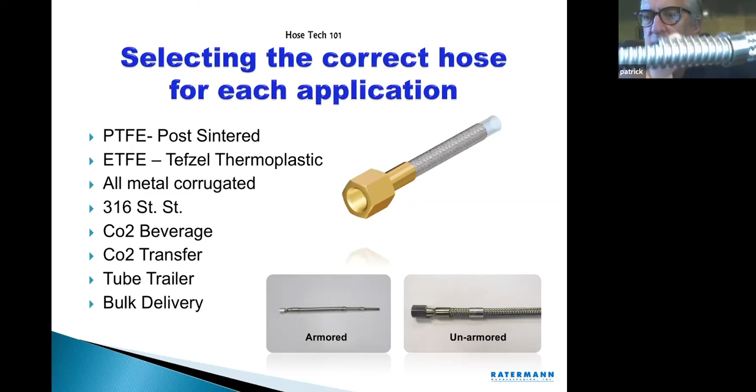Hydraulically, you're pushing the metal, which is much softer. The reason I bring that up is when you mechanically form this corrugation, the very crown of the corrugation is susceptible to cracking when you're filling and the flow rate goes beyond 150 feet per second. So when you're filling with hoses like this, a liquid transfill hose, you never want to exceed a certain flow rate for the hose you have.

And by the way, every hose out there has information stamped or engraved on it. It has the date it was manufactured, the manufacturer's name, and the MAWP, the maximum allowable working pressure. That's a key piece of information that you need to get when you're trying to qualify a hose for a customer. So next slide, please.

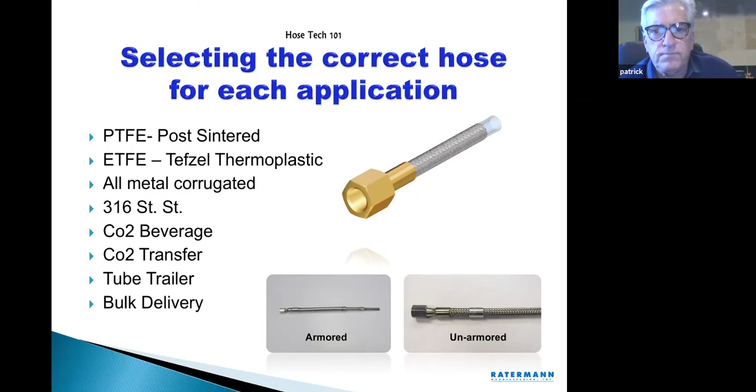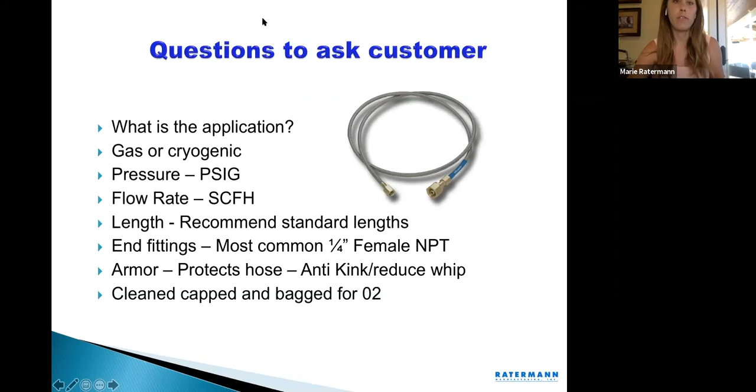Hey, Patrick, I just want to jump in. I think there's one person that isn't muted and keeps popping up. If you wouldn't mind just double checking that you've muted yourself, or mute your cell phone if you're using your cell phone. Thanks. Okay. All right. When selecting a hose, it's important that... that's my security system.

When selecting a hose, it's important that you ask 8 questions if you want to get the correct hose. First off, what's the application? Is it gas or is it cryogenic? What is the pressure you need the hose for? Knowing the maximum pressure is key to getting the right hose. You want to find out, do they want the hose to be 3,000 maximum pressure?

Most fill plants today will fill up to 2,200 at 70 degrees. 3,000 gives you some cushion. If not, we have hoses that go all the way up from 6,000 to 10,000 PSI. Okay, next question is, what's the maximum pressure the hose will see?

After that, ask... somebody must have their microphone on out there. If you wouldn't mind putting it on mute.

You can ask the customer the flow rate. That's important for the size of the hose. I'll be honest with you, over the years of doing this, most customers are not familiar with what their flow rate is. So don't be surprised if they don't know their flow rate. Pressure is more important, making certain that you have the maximum working pressure.

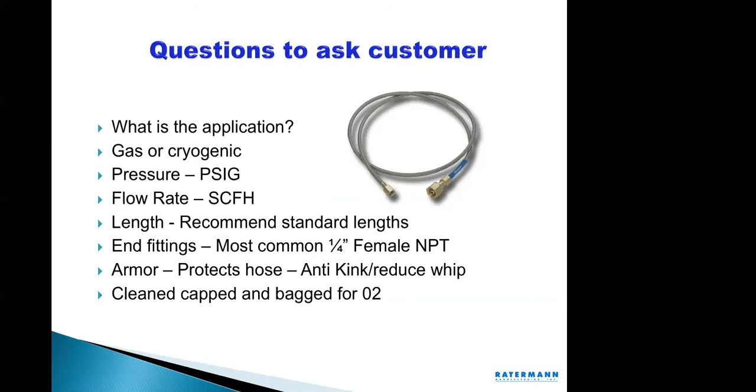What's the maximum working pressure? Flow rate, I don't think you're going to get it, but try it. Length, try to get the lengths in 12-inch increments, 6 foot, 8 foot, 10 foot. That's how we stock them on the shelves. End fittings, whether you need FJIC or you want 1/4 inch, tell us. We could pretty much make any configuration you need.

Armor, it protects the hose. I recommend armor to everyone because the hose will last longer, and as I said before, you won't be able to crimp it. And then last but not least, you want the hose clean, capped, and bagged for oxygen use. So those are the questions.

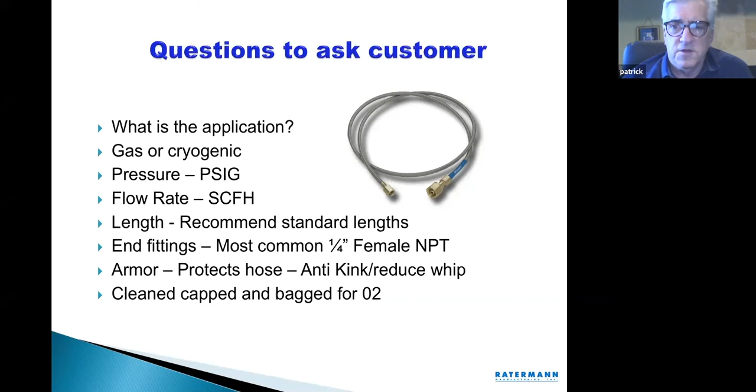Now, I'm going to go through this pretty quick. Permeation, these are some of the common hose terms you hear out in the field. Permeation, as I said earlier, would be compared to a balloon that has helium in it. And the helium will eventually work its way out. That's called effusion. Diffusion would be the opposite of that, gases working their way in.

Maximum allowable working pressure is a question you should ask every customer. What's the maximum the hose is going to see? That will help you determine what's the best hose for its application. Diffusion and effusion has a lot to do with the size of the molecule. The 2 smallest molecules that we deal with on a daily basis are hydrogen and helium. Those are the 2 I'm most concerned about in regards to permeation.

Burst pressure. Every hose has a burst pressure. Typically, that burst pressure is 4 times the MAWP. So if a hose is set up for 3,000 maximum working pressure, the burst pressure is going to be 12,000. In our book, you can find this information. It's throughout our booklet. On the hose section, it'll tell you what the different bend radiuses are and what the maximum working pressure is.

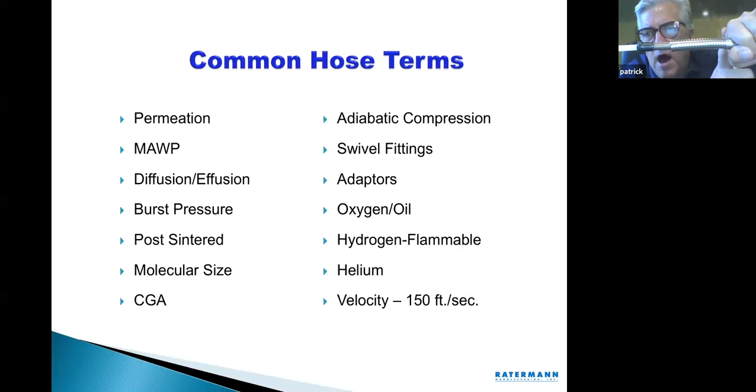So imagine there's oxygen going through here. The adiabatic compression hits the back end of the valve, it's closed, and the heat starts building up in this area. This is where you typically see adiabatic compression taking place. It will literally melt that hose and it'll explode. And it's a pretty loud experience. You'll hear about it from time to time. That would happen about 5 or 6 times a year across the country.

Swivel fittings, I highly recommend swivel fittings, especially on hoses where you're going to need to take it off and on. They don't both have to have it, but one end of the hose needs to have a swivel fitting if you want to be able to put it on without twisting it too hard. Adapters, we've got an adapter for just about every application you could imagine. I would say this about adapters: use as few of them as you need to. Basically, they're another point where you might have a potential leak.

Oxygen and oil, I shouldn't have to tell anyone on this meeting about oxygen and oil, but just in case you don't know about it, they do not mix. You don't want oxygen and oil near each other. If you think that a hose has oil on it, don't use it. Take it out of rotation. You want to keep oil away from anything with oxygen.

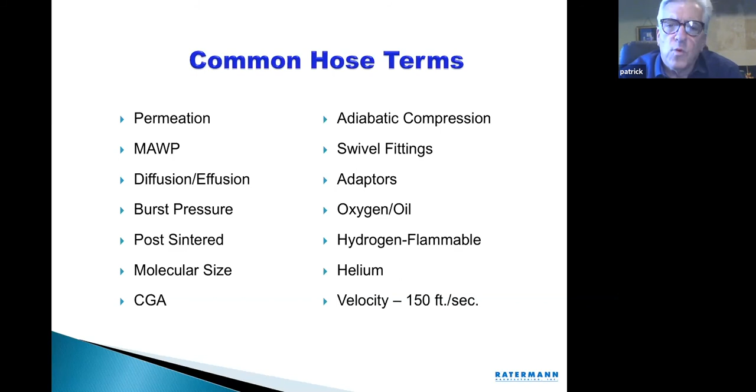Teflon type hoses are used more commonly in fill plants: 6 packs, 12 packs, Teflon hoses. Rigid hoses, I don't recommend at all. Rigid hoses had a time when they were the hose, and through experience of using rigid hoses, people learned that they're going to crack. And I tell people you're always one bend away from it cracking, and they will eventually crack on you. Rigid hoses are the reason the flexible hose industry even started. They needed to find a better way to do it. And they came up with the Teflon type and the corrugated type steel as the inner core, and then use the stainless steel as the braiding for the strength.

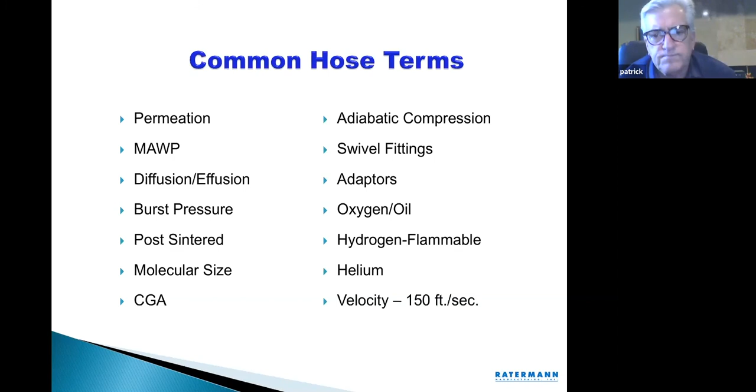Next slide. These are the hoses in the book. I've got the page numbers on here. As I said, get your hands on one of our catalogs because in the classes we will refer to the book. But these are your two standard hoses that if you had a customer that needed a good quality hose for any application, inert gases, anything in the shop, we can make these hoses up to 30 feet in distance and put basically any kind of fittings you need on the end. If you're unfamiliar with fittings, use 1/4-inch NPT. It is the most popular fitting, and you can adapt almost anything over to it.

FPT type hose in our catalog is basically the same as the FP, but it's the post-sintered hose. So permeation drops 75%. I have 2 layers of braid, so it goes up to 3,600. So this is a more robust hose than the FP. It has a lower permeation rate and a higher MAWP. Good hose. For about, I'll say, 23% more in cost, it's well worth it. Next slide.

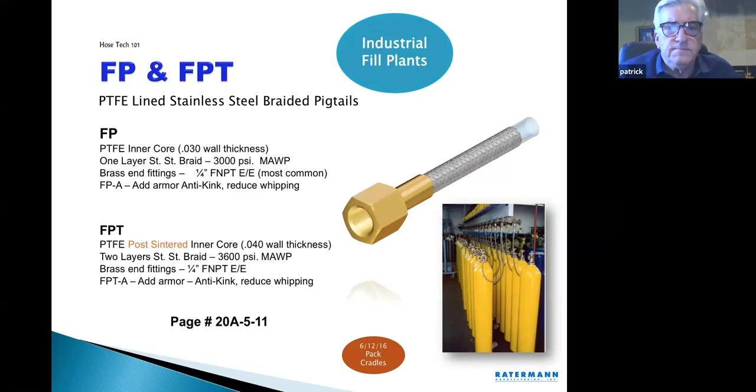We have a hose, if you have anybody doing any gas work and you want a very high quality hose, we just came out with this about 1.5 years ago, FPB. It's got a conductive liner in it. It's designed specifically for acetylene. Will it work with propane? Yes. This is well above what you would use in a propane application, but if you have anybody using high purity acetylene or a critical application, this is a great hose and it's economically priced.

It does have a PTFE inner core that is conductive. We can put basically any kind of brass fittings on this hose, but up until about 1 year ago, this type of hose would have cost in the neighborhood of around $65. These sell for about 43, right in that neighborhood. So they're quite a bit cheaper than what we had previously. Next slide.

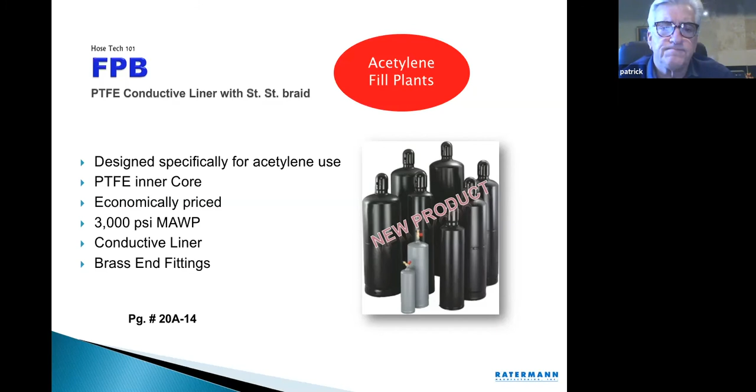This is an all stainless hose. This is a 1/4-inch hose designed for high purity gases. When you use this hose, all the gas will see is stainless, 316. It's all steel. So as I said earlier, with the all stainless steel inner core, there is 0 permeation. So you don't have to worry about any leakage, any gases effusing or diffusing. The working pressure on this hose is 3,850 PSI. This is probably one of my favorite hoses in the catalog. Great for high purity applications.

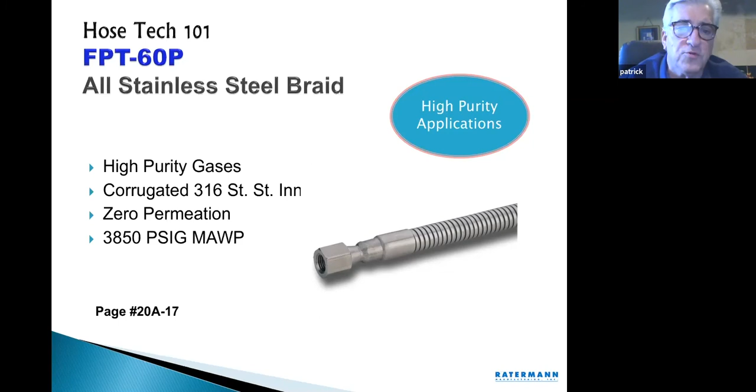We can make this any length you need it with just about any fitting you need on it. We do have a program, I'll talk about it at the end of our session, that can figure out a part number for the exact type of hose you need. Next slide, please.

This is FPZ. This is a Tefzel type hose. The inner core is ETFE, so that means it's a plastic formula. It's basically designed to lower permeation. It brings the permeation down about 60% compared to the FP with an economical price. You need to let us know which one you want, but you can purchase it set up for 3,600 or 5,000 PSI application. Very low effusion. Tefzel is the name of it. Typically, we can put JIC end fittings on this or NPT. You can armor; again, I recommend armor on all of these hoses. Next slide.

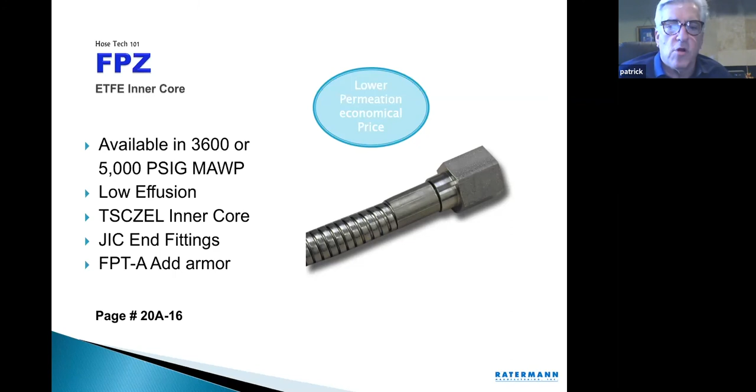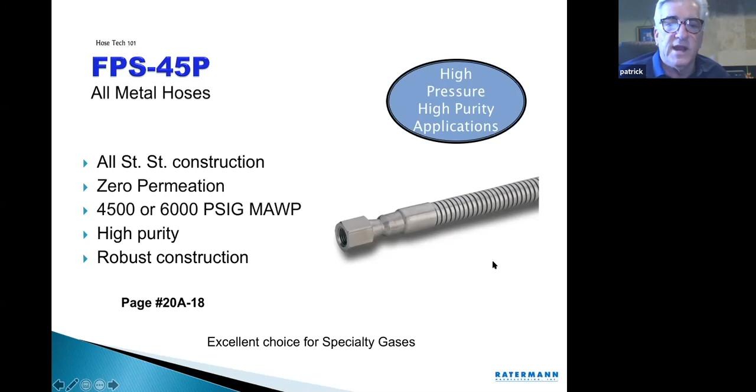This is FPS 45, very much like the hose I showed you earlier, all metal, all stainless. This one will get you up to 6,000 PSI. Great for high purity applications, a very robust hose. Keep in mind, if you're putting it in an application where you're going to be tightening down both ends of the hose, make sure you put a swivel on one end. Next slide.

FPS-C, the picture fell off of this, I apologize, but we do have hose made out of Monel. The inner core is 100% Monel construction. So if you're working with chlorine or corrosive gases, we do have a hose that'll fit that application. We can custom make it any length that you want. There are some companies out there that use Monel for oxygen, and Praxair is one of them. It's become very popular.

This is a great hose. I can see right now I made a mistake on the slide. It says PTFE inner core. That's not accurate. I'll take that off. It's a Monel inner core. And so keep in mind that we do have Monel hoses available. Next slide.

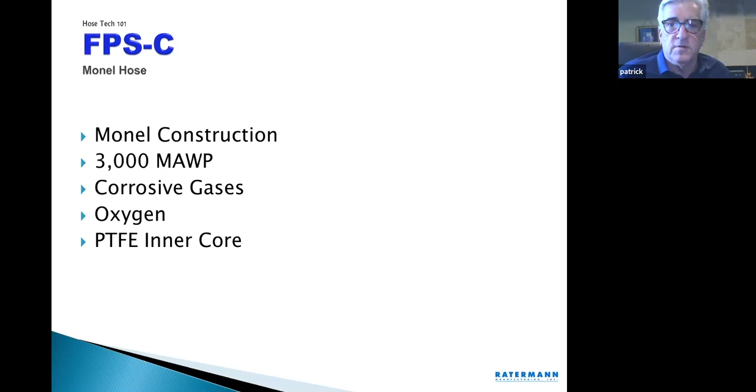CO2 hoses, this is where I wished everyone had a catalog in front of them. When you get the catalogs, you can look through it and you'll find that we've kind of fortified our CO2 line. We have a lot of hoses to choose from.

The typical hose TPL is designed for gas or liquid applications. It's 3,000 PSI MAWP. It's a great hose for beverage applications in a restaurant, bar, wherever you're setting up a gas system or a welding station. These hoses will work great for CO2 transfer. Good hose in 1/4 inch. Next slide, please.

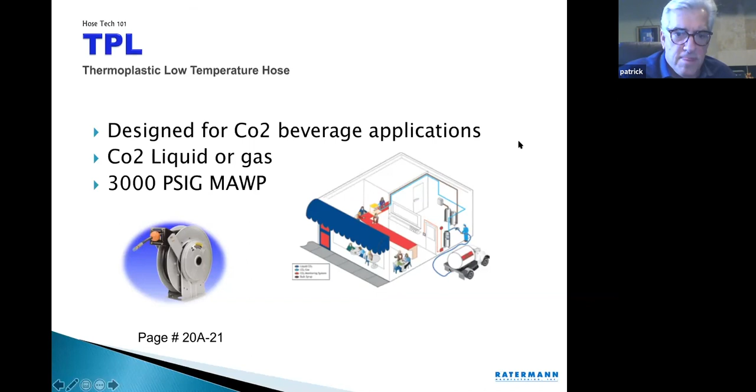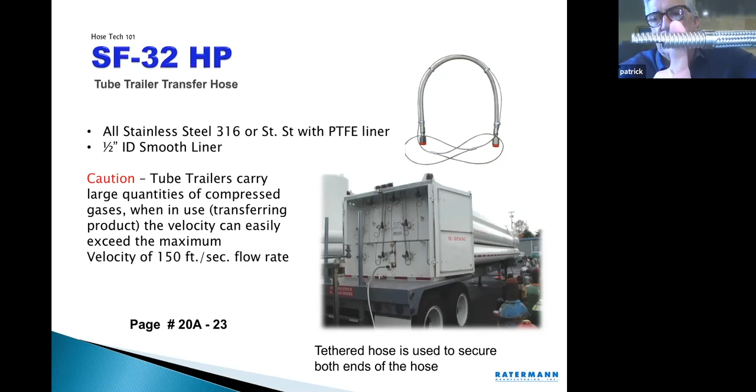This hose with a Teflon liner in it can handle up to 4,000 MAWP. It's a great hose. If you have any applications out there where you're going up that high in pressure, I highly recommend you get the tube trailer transfer hose with the PTFE liner. It has a 3/16 shell, just like this, but it has the Teflon inside. Okay, next slide.

Liquid transfer, pretty easy. These hoses don't have to hold a lot of pressure. Typically, they'll go up to about 1,000 PSI MAWP. These are set up in our catalog where you can purchase the hose with a gas diffuser. They're 1/2-inch ID liquid transfer lines. We have like the top 3 gas diffusers we offer with this particular hose, and you can find it on the shelf in 4, 6, 8, and 12-foot lengths. Very popular hose. We keep these in stock in both Nashville and Livermore, California. Next slide.

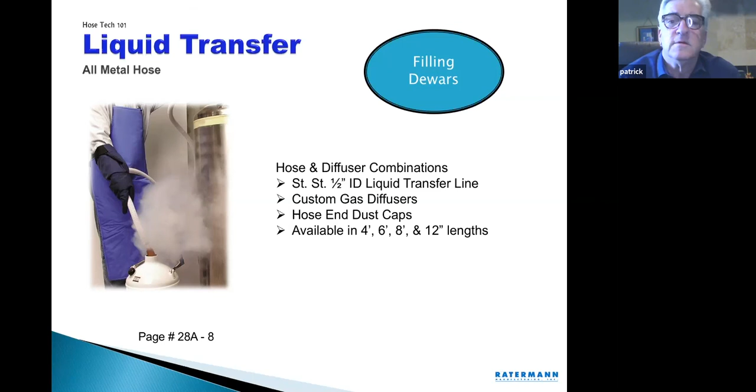Cryogenic bulk hose. In the catalog on section 19B, there's probably 20 pages that will tell you every bulk fitting that you might come across, all the way from 1 inch to 1.5, 2 inch, 2.5. We offer them with 18-inch armor cuffs or full-length armor. Custom lengths are available. We can get them oxygen cleaned if that's what you want, but bulk hoses in our catalog, we cover them in great detail. So again, another reason to get that catalog. Next slide.

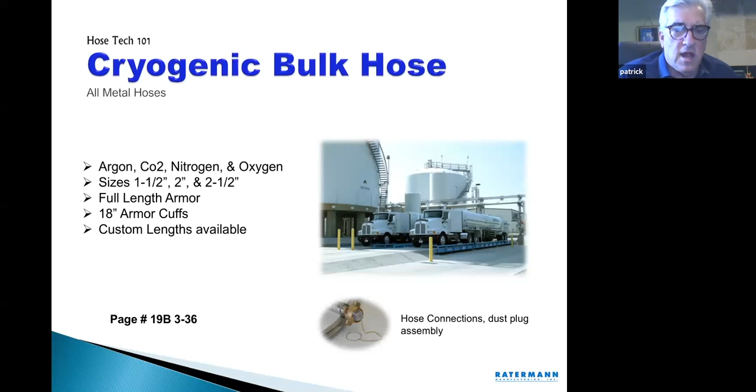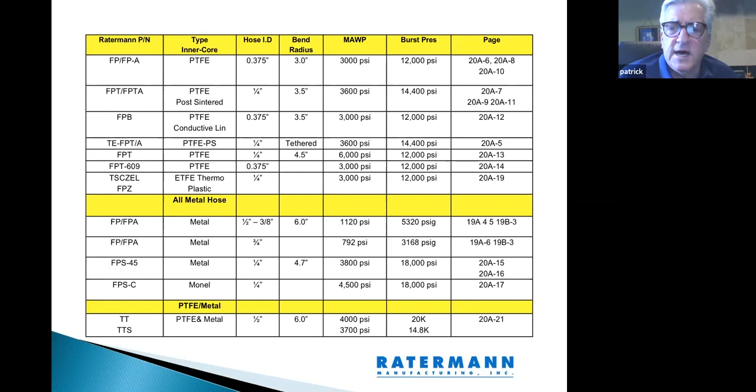This is a graph, and I'll make sure we get this to the key person. This is basically all the different hoses we have, and it's a quick way to identify for a particular pressure which hose you want to use. I can make this available. After we get done here, I'll find out who I should send this to, and we'll make this form available to all of you. Next slide, please.

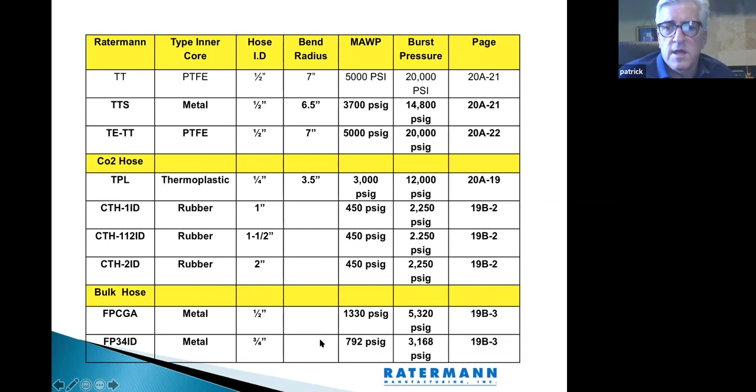Same thing, goes over the bend radius, size of the hose, and the working pressures. And then the last piece of information basically tells you where you can find the hose in our catalog. Next slide, please. And that's it.